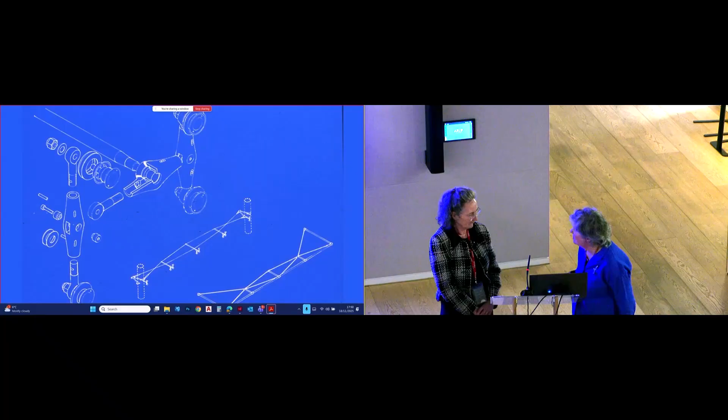So in these diagrams on the right, you've got the big cable truss which stabilizes the columns and beams, and then behind each seam between the pieces of glass, you've got those little cable trusses. So when the wind blows into the building, it's the inner cable that takes the tension, and when it comes out, it's the other cable. It's actually quite a flexible structure.

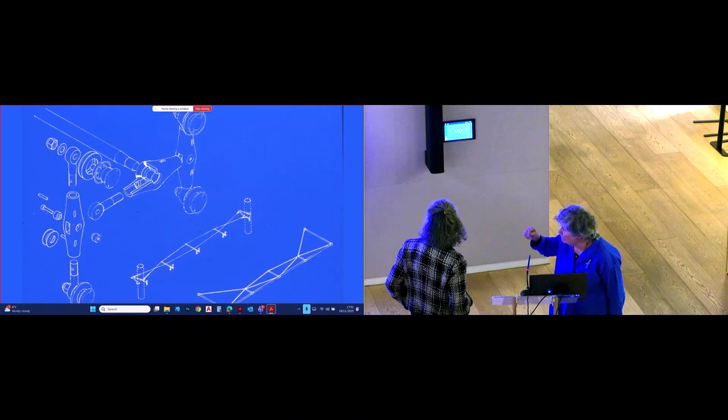And so we had to really worry about how you would attach the glass. Glass is very strong in tension and compression, but not very strong in bending—well, it's the tension part it's not so good in, because it fails brittly. So we had to make sure we didn't put bending stresses into the glass as it deflected. You can sort of see in that exploded mechanical bit, there's actually a spherical bearing that goes round the bolt, so it's as close as we could get to putting a pure pin in the plane of the glass, which is something that stuck with me.

Yes, because when we left the AA, we actually set up a model-making company. We didn't actually go and work for architects straight away. We were doing all the models for the lightweight structures, because it was a seminar where they invited engineers to come from all over the world and learn about lightweight structures with Peter Rice and Frei Otto. And we were lucky enough to hear Frei Otto give his talk, which was absolutely amazing. He had the wisdom of an old man and the enthusiasm of a child. It was just fantastic.

And then after David and I set up, we decided to go in for this competition, the Bridge for the Future, which was organised by the Institution of Civil Engineers. They called for a bridge of the future that had some relation to nature. That got us thinking about what was nature's biggest bridge, and we decided that it was the spine of a dinosaur. So that generated the idea for the bridge.

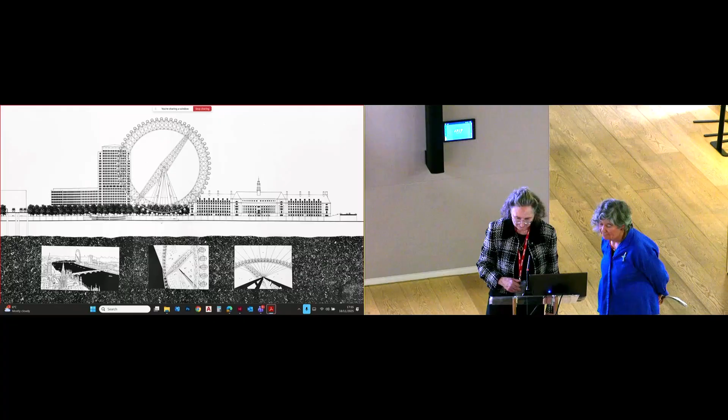Also, Jubilee Gardens was the site of the Festival of Britain in 1951, so there'd been a great celebratory heritage on this site. There were many reasons to choose this as the correct site. And of course, we asked Jane to work with us - she was at Arup at the time - and we attempted to redesign the wheel, which is probably...

So I got this phone call just before Christmas - would I come for a meeting? Dave and Julia said they wanted a wheel of the 21st century, as transparent as possible. I think ideally they would have had nothing between the spindle and the rim, and I explained that would be tricky. So the least structure we could have was this beam going right the way across.

But of course, it did have two huge semicircles of complete daylight, but that does mean the rim is quite heavy. Julia had spotted this site right next to County Hall, but the other crucial thing is that it's actually hanging over the river, so that meant we needed a cantilever spindle. The other thing was we decided right at the very beginning that the capsule should be on the outside, not dangling inside a truss, and that was that.

So this was a first. It was very much the idea that visitors would be like on top of a mountain in the middle of the city - they would have a 360-degree view, and that was what we were trying to create. And it wasn't a white knuckle ride - no, it was very gentle.

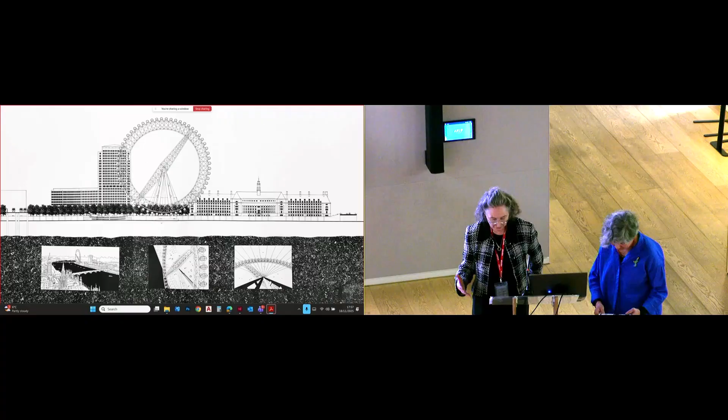But we didn't win the competition - in fact, nobody won the competition. But we thought it was a good idea, so we pursued it. We founded the Millennium Wheel Company, did a back-of-the-envelope business plan, and after preliminary discussions with landowners, we submitted a planning application.

This came to the attention of Mira Bar-Hillel, a journalist on the Evening Standard, and she showed it to her editor, Stewart Steven, who immediately loved the idea and ran a Back the Wheel campaign. We also had some very good printable images, because computer imaging had come of age at that time. We met Alan Davidson, a pioneer in CGI imagery, and the photographer Nick Wood, and created some great images that got shown in other newspapers as well.

As a result of this additional publicity, the wheel came to the attention of Bob Ayling, CEO of British Airways. In December 1994, he was looking for a Millennium Project, and we were looking for investors. He shared the vision of the project, so he took 50% of the company and loaned us £600,000.

That enabled us to employ Arup properly and do a proper planning application, and also have another look at the structure, because redesigning the wheel was probably not fun. This wasn't the lightest, because you had to span, at the time, 500 feet, that arch.

So we said, well, let's think about the bicycle wheel. The bicycle wheel is the most magical tensegrity structure, really, because the vertical load comes to it from the spindle, and it's actually the horizontal spokes, only a couple of millimeters in diameter, that stop the wheel going into a horizontal oval. So they go into tension, and the support is provided from the ground. Also, there's a very slight angle between the spokes that go to either end of the hub, and that takes some of those lateral forces.

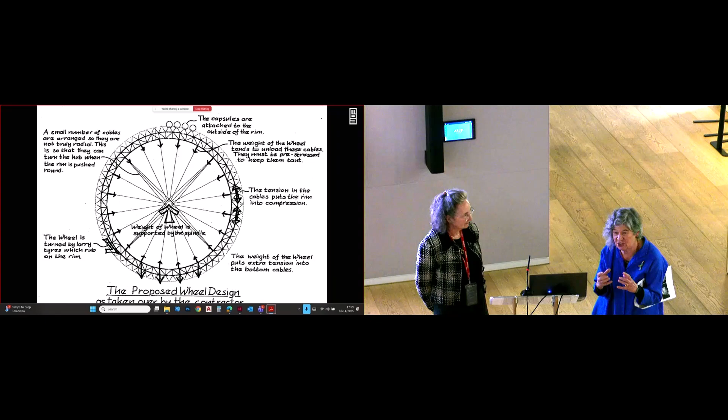Also, we've got cables going to either end of the spindle to resist the wind loads, and for this wheel the horizontal loads are pretty significant. When the wind blows, the cables on the windward side get more tension, but the ones on the leeward side tend to go slack. We don't want any of the cables to go slack, so we pre-stress it, putting the whole thing into compression—I'll come back to the consequences of that later. Right away, we also had the capsules on the outside.

So this was the structure we developed for the planning application. Over the next two years, David and I presented the project to all the principal authorities, the government bodies, English Heritage, Royal Fine Art Commission. That didn't go terribly well, but most of the other societies were really positive about the project.

Then we got full unanimous consent in October 1996. This is a model we were able to build with the £600,000 we got from British Airways, and this is one of the other images we presented—the Queen's eye view from Buckingham Palace. You can see it's still 60 capsules at this stage, because we saw it as a symbol of time passing—60 minutes.

One month later, the then Secretary of State for the Environment gave his opinion, and he could have called it in—it was John Gummer at the time, and if he called it in, he would have killed the project. But instead, he wrote a parliamentary answer that said, 'The wheel is an inspired idea that has caught the people's imagination and will boost the economy of the South Bank.'

I was lucky, I was on holiday in Singapore. I received this fax, and you can imagine me leaping around my bedroom in that hotel at this brilliant news. So that was full speed ahead.

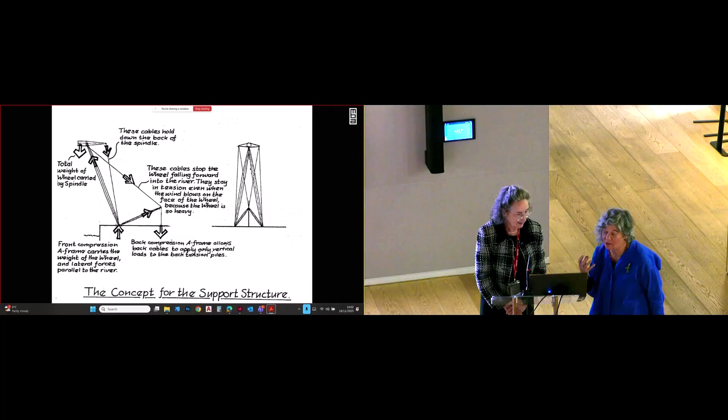One of the things we wanted to do was make the wheel sit as lightly as possible. This was the original concept for the support structure. It's basically an A-frame, and the cables at the back stop the whole thing from falling forward into the river. The weight of the wheel is such that however strong the wind is blowing, it would never tend to blow the other way, so we didn't need cables going into the river as well, which was lucky. We had that little A-frame at the back to deflect the back cables so they would come down to the ground vertically, minimizing the horizontal forces.

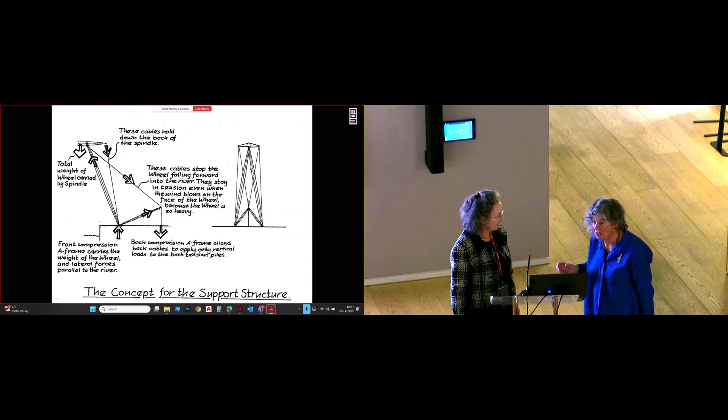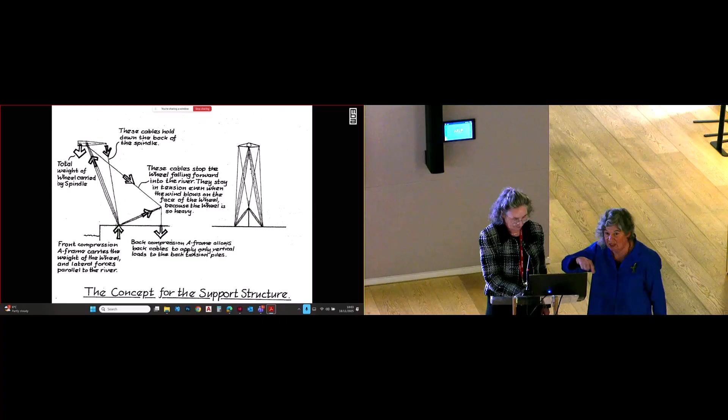Later that got changed because the construction method changed. At the time, Arup's project manager, Peter Platt-Higgins, was looking at how we would construct it. The original plan was that we would build it in segments, vertically, and then attach the capsules at low level. But later that changed.

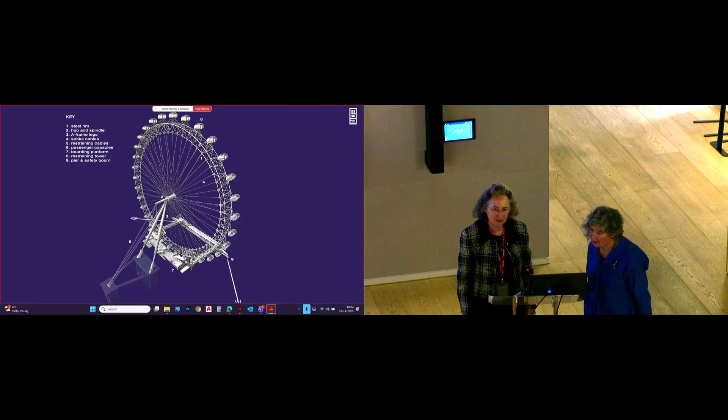So the final design doesn't have that back A-frame, but it does mean you have to have those big ground beams connecting the piles under the three support points. You also see that here we've changed the number of capsules, so it's no longer 60 capsules but 32 capsules, which is what we've got now.

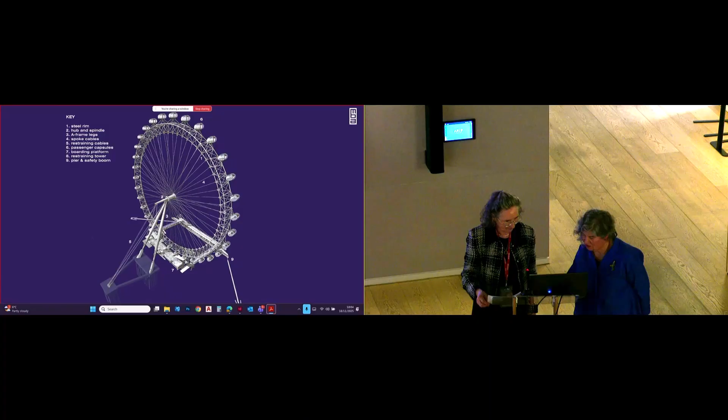That was actually quite a good thing, because to keep it affordable, but also you're not seeing the person in the capsule next door - you actually do see that 360 degree view. So that was a cost consideration.

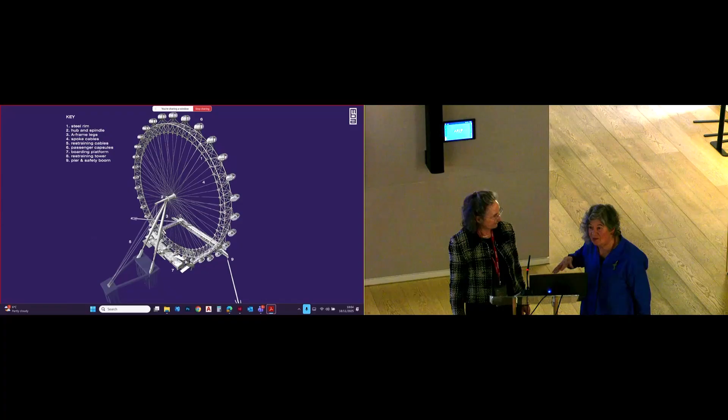Value engineering was beneficial. You can see there's a structure to the right that's in the river - when you go, you'll see there's another pier, and it works as a pier but it's also providing vessel protection. We had to design the wheel, even though most of the time the water is very shallow under the wheel, for a 60-ton vessel hitting it, so that's protection for that.

I mentioned we had to put a lot of pre-stress in the cables to make sure they never went slack. But that put compression into the rim, and you've all seen a buckled bicycle wheel, where two quarters come towards you and two away from you.

That's what we really had to do a lot of analysis for, to work out the optimum size for the triangular perimeter truss and the optimum length of the spindle, because the longer the spindle, the larger the angle between those wind-resisting cables, meaning the forces were less. But you didn't want the spindle too long, because then it was impossible to build. Similarly, if you made the truss stiffer by making it bigger, you'd make it heavier, and then you'd need more pre-stress to counteract those forces, so you'd be going in circles.

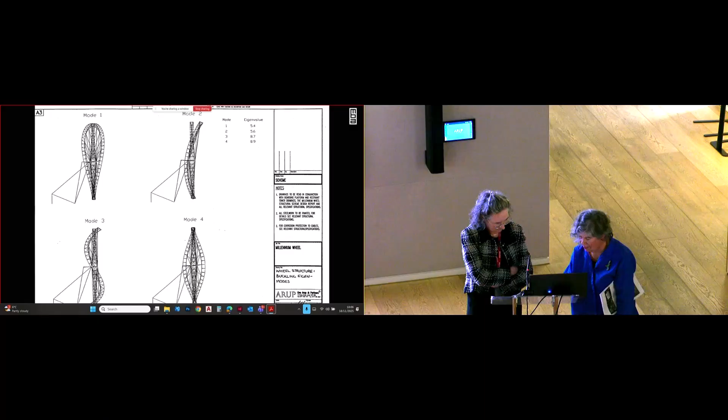So Pat Dallard, a structural engineer - I don't know if some of you remember him - wrote fantastic programs so that we could optimize those dimensions.

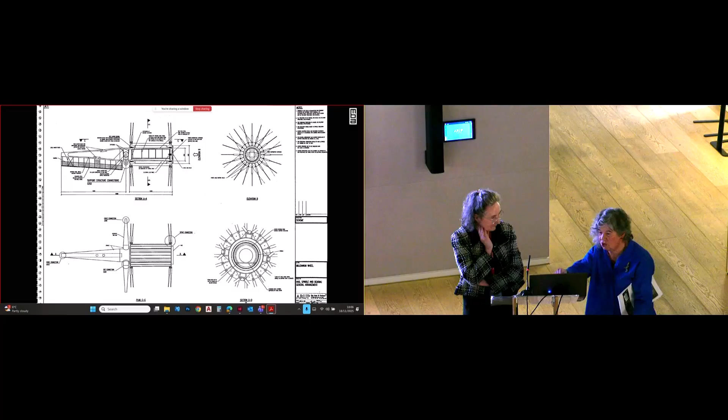Then we worked hard on the hub and spindle and what it should be made of. It's a bit like a bicycle, and we've got two sets of ball bearings - you'll see what it ended up with finally, but it was not so different from this.

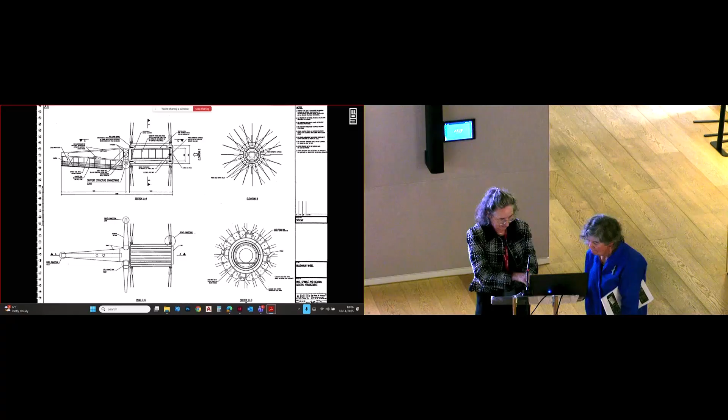Again, we looked at lots of different combinations of how many spokes would be the best and most efficient, so that we weren't getting buckling, so we could make the rim as light as possible, and also we were always aware that we had to make sure it would still be beautiful.

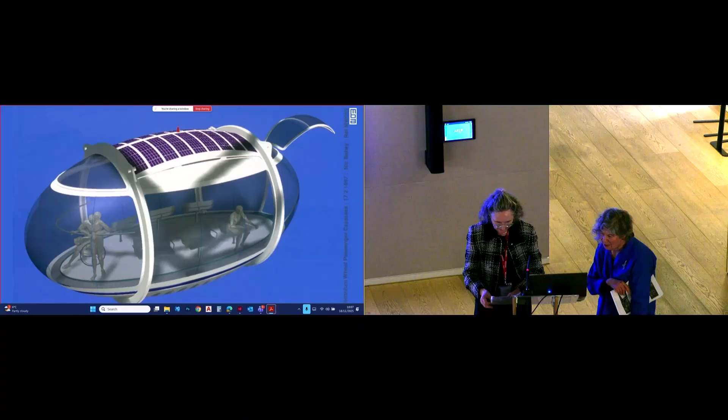Just focusing on the capsule design, the fact that the capsules are on the outside means that they're supported with circular mounting rings attached to the rim, and they have to be motorized. There has to be a motorized stability system that drives the capsules around and maintains the level. We worried about a whole team of rugby players jumping on one side so that by the time it came round, the wheel or capsule would be upside down. But the capsules are aerodynamically shaped to minimise drag on the main structure.

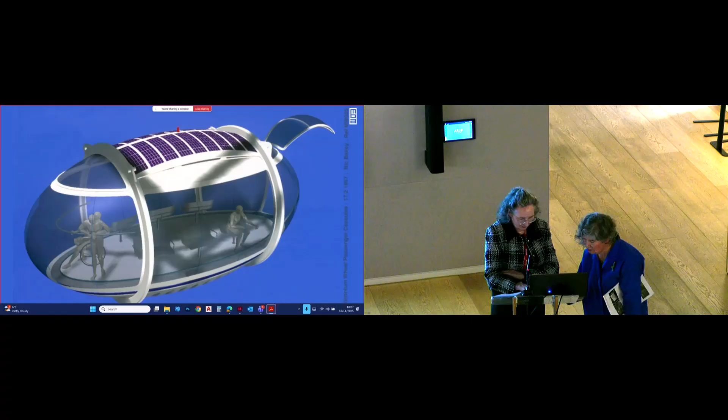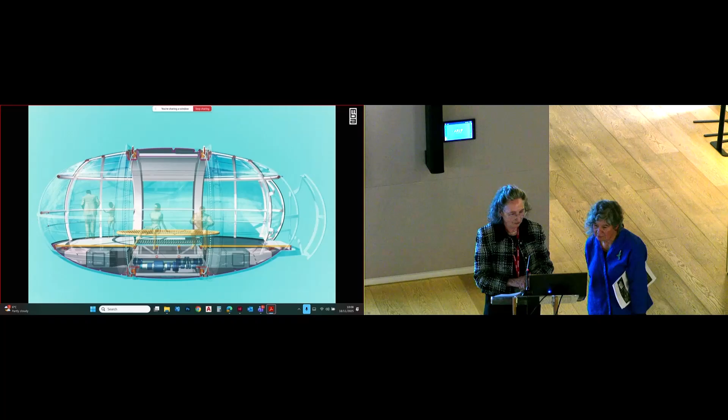On this one, this was a very early design, and the outboard mounting ring is on the outside. We found that having it on the outside actually contributed about 40% extra of the total wind resistance. So we pulled the mounting rings onto the inside, and that dealt with that issue.

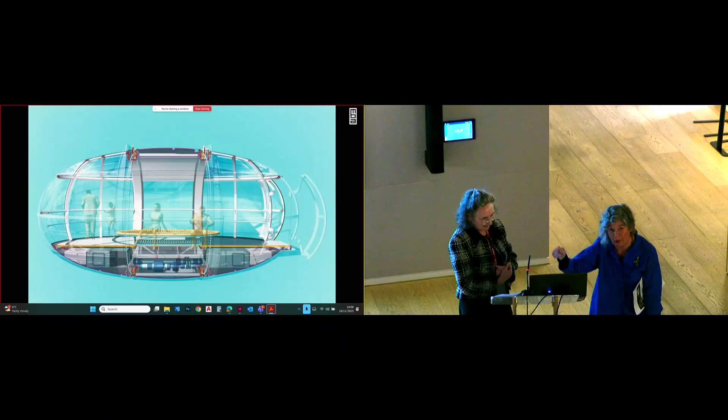It's quite a complex system of maintaining the level, and you can see it's all under the floor. I'm not sure if we've got time to go into it in too much detail, but there are wheels under the floor that run on the inside of like a huge cogwheel, and they're motorised, and that's all linked in.

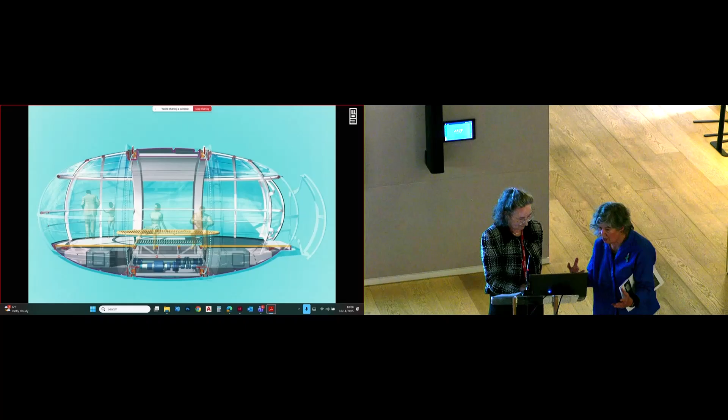It was a very good combination of Nick Bailey, who was working on the appearance and how it would function for the number of people using it, and John Lyle at Arups, whose background is more car design, and then Poma as well feeding in. So it's a really good collaboration.

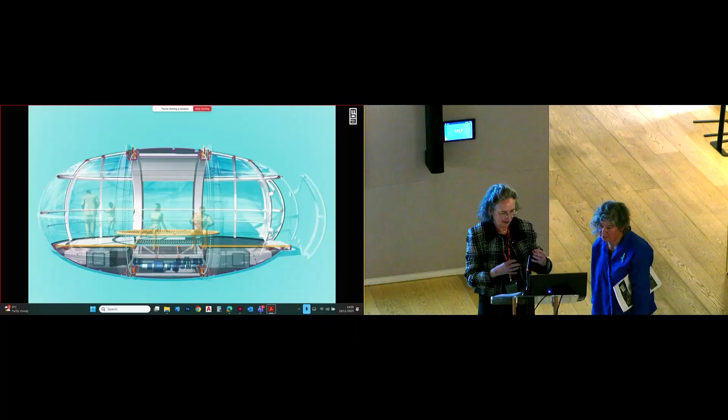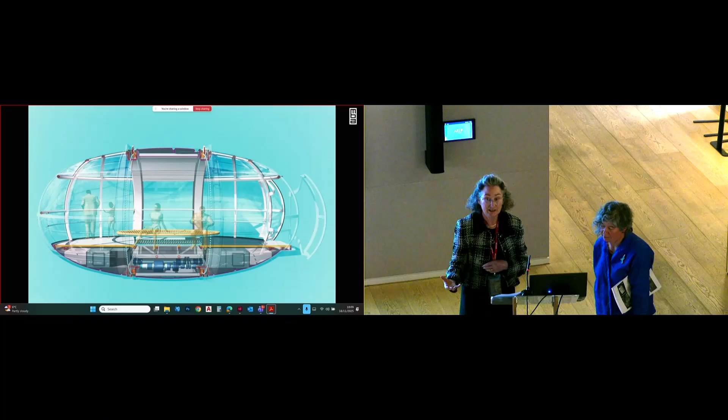The thing about it is that although it ends up being quite innovative, all of the pieces used there are actually pieces that existed. The technology existed. So the innovation part was actually bringing tried and tested technology together in a new way, and that was the kind of innovation of the thing.

I mentioned before that British Airways wanted to have a main contractor, and we actually went out to tender, and then Mitsubishi were signed up because they were £10 million cheaper than anybody else, on Christmas Eve 1997. But during subsequent negotiations, they reduced the size of the wheel and the number of capsules, which was actually a good thing. But by April 98, things had gone very much awry, and there was a fateful night when we were forced to kill the project.

Mitsubishi were insisting that the only way they could achieve the programme and our immovable deadline was to do bog standard capsules, and this was what they showed us. This is literally the specification: English oak floor replaced with another cheaper material, handrails replaced with iron and steel, and the stability system removed and replaced with a gravity system.

We were presented with this, and we were actually told by our partners that if we didn't say yes to this, we would kill the project. So we had no option but to say no, because we would have been laughingstocks, and it's not what we got planning permission for.

So we did say no, and then it was actually Tim Rennick, a project manager at Mace, who helped patch things up. At a crucial meeting of British Airways, they agreed to change the funding structure that enabled the construction of the wheel to go out in individual packages, and Mace were appointed as construction manager. Hollandia and Poma were the principal subcontractors, and in the end we found no British money—it was a German bank, West LB, and a Japanese bank, Sumitomo, who actually funded the wheel.

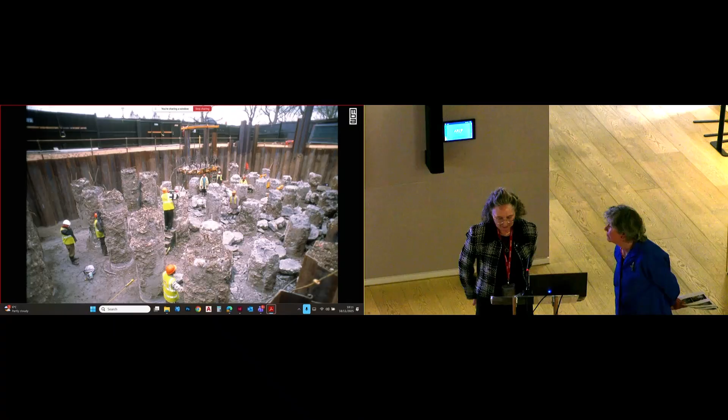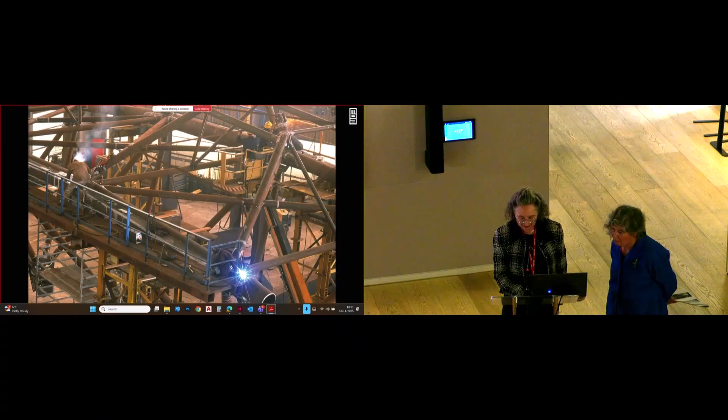By that time, what should have been a 2-year programme had to be built in 15 months. This is the site in December 1998, with one year to go, showing the tops of some 44 concrete piles that go 33 metres down into the ground. This is the Hollandia factory, where over 60 welders worked in 3 shifts for 8 weeks to manufacture the rim.

It was a 64-sided rim that was constructed on the jigs in Hollandia's factory.

And then this is each of the 16ths completed. The rim sections are welded together as quarter sections, ready to go across the water to come to London. That was fortunate that pieces could come just by sea the whole way. Yes, they just came on barges.

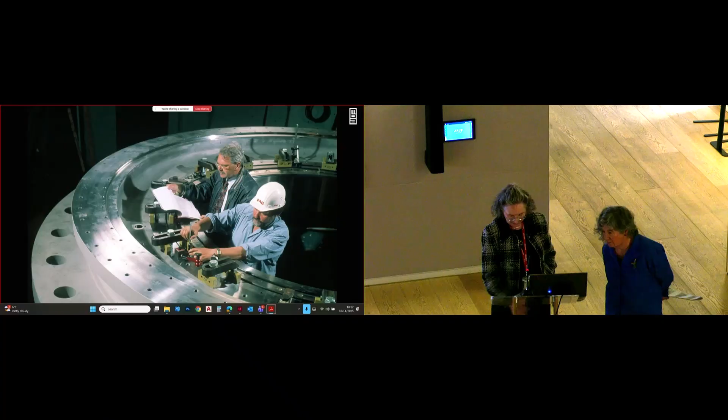And meanwhile, in the Czech Republic, the spindle is being made. It was fabricated in 7 sections of cast steel using a very special steel recipe, where each piece took 2 minutes to pour and 1 month to cool down. A crucial piece of engineering, of course, is the spindle, because it takes all of the weight, as Jane has described. And then this, back in Holland, is the hub being fitted to the bearings a bit later on, with all of the bearings being German bearings.

And this is the hub and spindle being put together. And then this is the cables being spun in Italy. Italian cables that were actually quite innovative in their own right as well.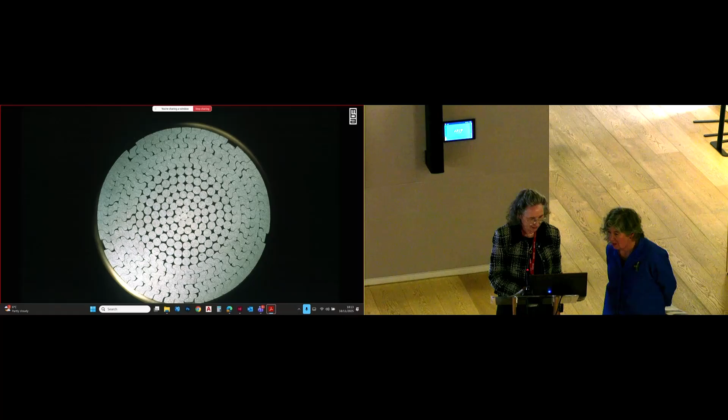But you know, when wind blows past a circular section, there's always a tendency, if it's constant, to get a slight horizontal perturbation. You see chimneys with a strake going round, which stops the airflow being so constant. These smaller elements give the equivalent of that, but it's like a recessed strake that goes very, very slowly, or gently, around the cable. So that was a good innovation.

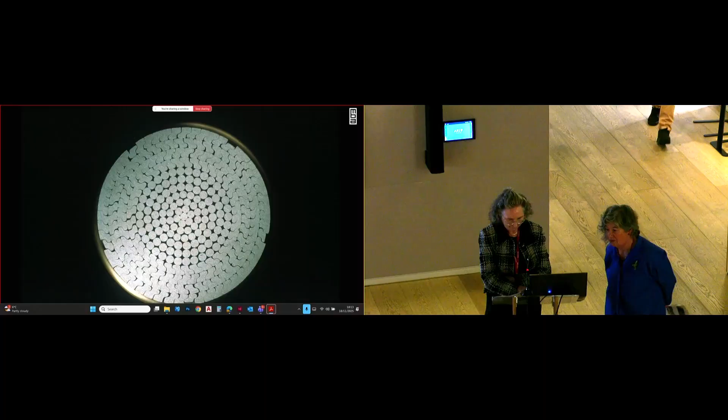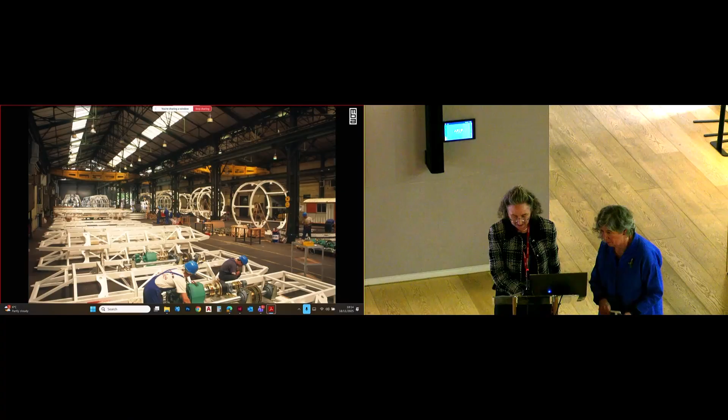And this is the capsule frames being assembled in the factory in Grenoble. And this is the first quarter section coming through Tower Bridge. We found out afterwards they didn't actually need to raise it, but they did anyway, just for a bit of theatre. And the fact that it was so visible on the river created quite a lot of buzz around.

And you can see that it was going to be built vertically, but then Hollandia in October '98 told us they had real concerns about safety and programme. I was quite lucky that because of the bend in the river, it's actually much shallower on this side, and it means the navigation channel is on the other side, so this wasn't in the middle of the navigation channel.

So it was built vertically, and this is it when it was completed and just about ready to be lifted, and this is it being lifted at 32 degrees and at 62 degrees. This is Boadicea welcoming the London Eye onto the skyline, and this is when it was vertical.

And then next, of course, came the capsules, looking like huge dinosaur eggs. It was amazing because by that time we'd lost a bit of time and had this immovable deadline, and they were able to fit all the capsules in 9 days.

And this, of course, is the Millennium. That was actually a picture from the Millennium.

One of the things I'm most proud of is that when we originally did the wheel, we only had permission for 5 years. After about 4 years, it was clear it was very popular and very successful, so we went back to Lambeth Council to get a further 25 years. David and I insisted that 1% of the ticket revenues from the London Eye should go to the local community in perpetuity, and we recently had an event celebrating that. It turns out that in the last 20 years, that's amounted to about £14 million that's gone from the London Eye to local community groups and to the South Bank. So that's great, that's pretty good, I think.

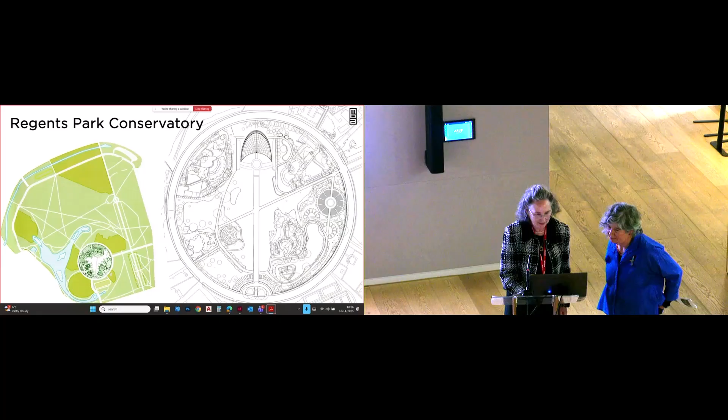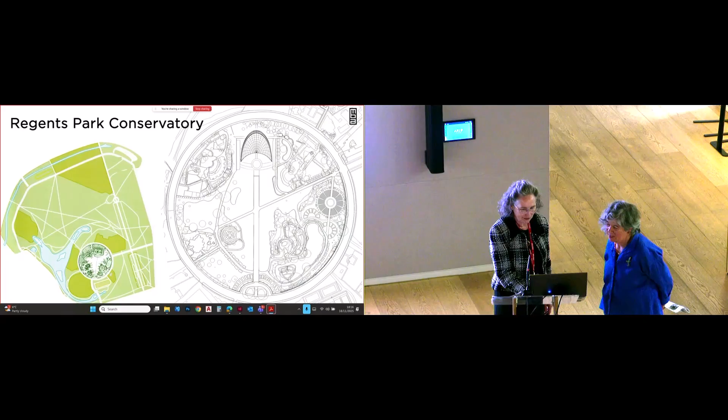And then this is another conservatory project that we did together. This was a project for the Regent's Park Conservatory that sadly did not happen, but we were trying to do a glass and tension structure, really trying to do a kind of 20th century version of what Decimus Burton and Richard Turner did. But sadly, it wasn't liked by certain gentlemen of royal distinction, if the word carbuncle means anything.

And it was very popular. But it used scaffolding, which is very expensive to keep.

So then we were brought on board as the team to do the treetop walkway. And an early decision really was what material it should be built out of.

So Julia and Tony Kirkham, the arboriculturist, and I walked round the site, which had been laid out originally by Capability Brown. There was a cherry picker there so we could see how high the pylons needed to be, which is 18 metres, and we discussed what kind of structure we should have that wouldn't compete with the trees, because the purpose was to see the trees and the canopy and appreciate that.

We thought about timber, but it would have been too massive because 18 metres is very high for a column. If it was steel, if you had to paint it, you'd have to choose a colour that wouldn't stick out like a sore thumb, and also that would be a lot of painting. Yeah, a lot of maintenance.

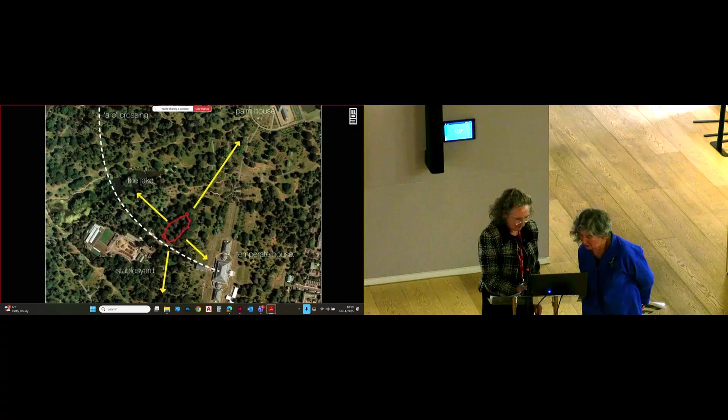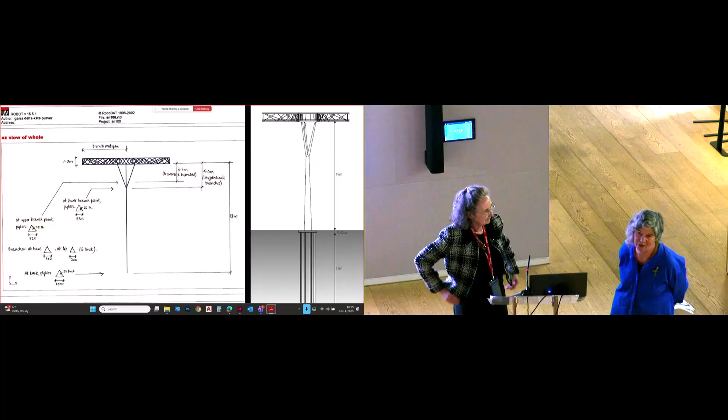So what was very fortunate about the choice of weathering steel is you can't get rolled sections. So QS couldn't tell me that I had to have circular hollow sections as the pylon, because I think that would have been horrible. I particularly don't like circular hollow sections, because I think they always look bigger than they are.

And I'm very fond of triangular sections, which look thinner than they are, and you get that sharp vertex. It also meant we could taper it, and that would be more economical, because it doesn't need to be as big at the top as it is at the bottom. That's what this is showing.

And also we decided that we wanted to incorporate the Fibonacci sequence, because all architects love the Fibonacci sequence. Yes, of course we do. Mathematical rules of the universe are visible to us in the form of beauty, as John Michell said.

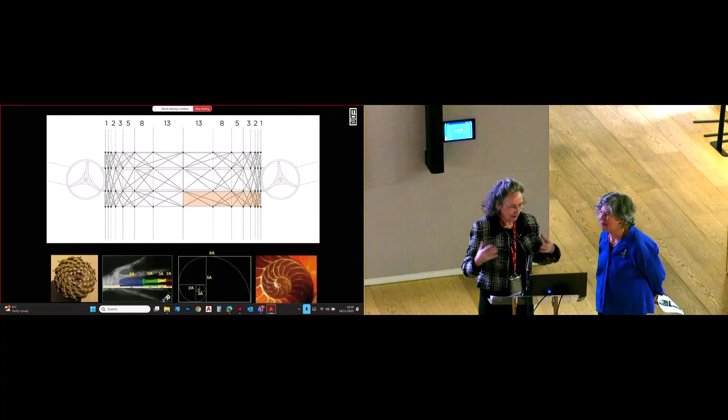So we decided that we wanted to put all the structure in the handrail. So you've got to have a handrail, and we just didn't want to have any extra structure either above or below. So it's all in the...

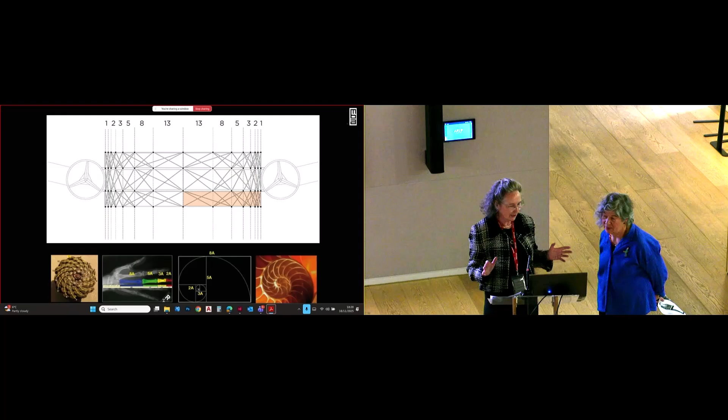And in fact, a very clever thing that Julia Barfield did was, because you've got that 100mm gap, we looked at other options where we had diagonals at 100mm centres, but it was just too fussy. They said, well, we can use this kind of Expamet as the cladding, and the structure should just be what it needs to be.

And then trying to think about how we could incorporate the Fibonacci sequence, so it starts off as small numbers that get wider and wider. With the truss, the shear is greatest at the supports, so that's where you would need the most diagonals.

So I said, let's make the spacing of the intersection of the diagonals with the bottom boom. The top bit is the balustrade, the middle bit is the floor, and it's like the whole thing folded out.

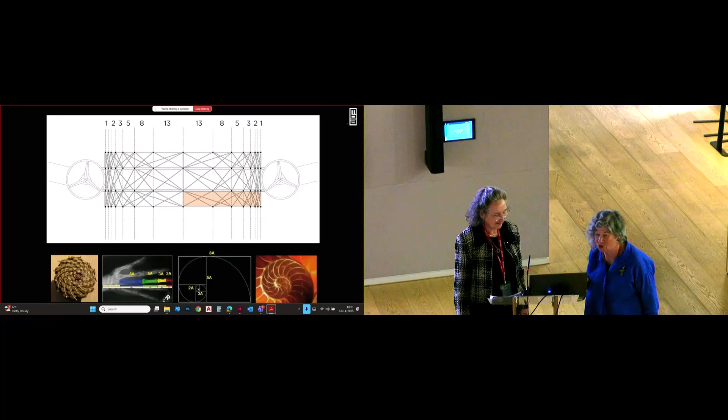And also we said, let's not have more than 3 diagonals meeting at one point. So then Julia and I sat down and we doodled joining the dots to satisfy that rule. And you can see the bit shaded pink can be flipped, so it's repeated - for off-site manufacture it's a lot of repetition, which makes it more economical.

And the thing about this project is that, like the other projects we've talked about, we also involved the maker very, very early on. So let's talk about this a little bit more.

So obviously we had to have foundations for these very tall pylons, and they're going to have quite a lot of horizontal forces on them. So you had to have a minimum of 4 piles at each location for the wind in any direction. And normally you connect your structure to your piles with a pile cap 1 metre deep, thick of concrete.

But the roots of a tree, it's like a wine glass - the roots go out horizontally in the top metre of the soil. If we were to put a big concrete metre-thick piece in the ground, we'd have severed all of those roots. We did do a mock-up, a plywood mock-up of the pile cap being above ground, and it looked horrible, of course. So we decided instead to join the piles together with this very, very heavy steel grillage.

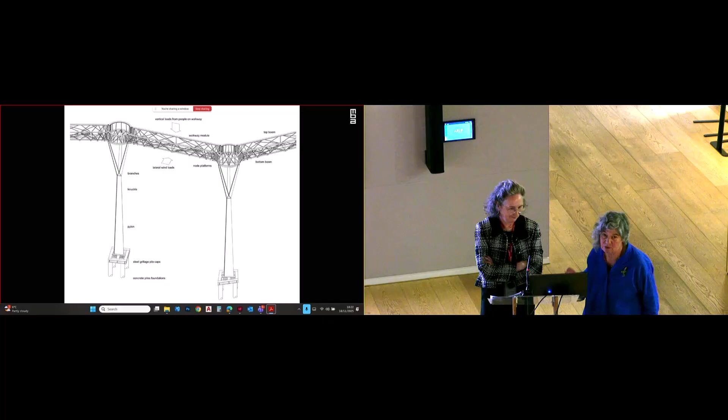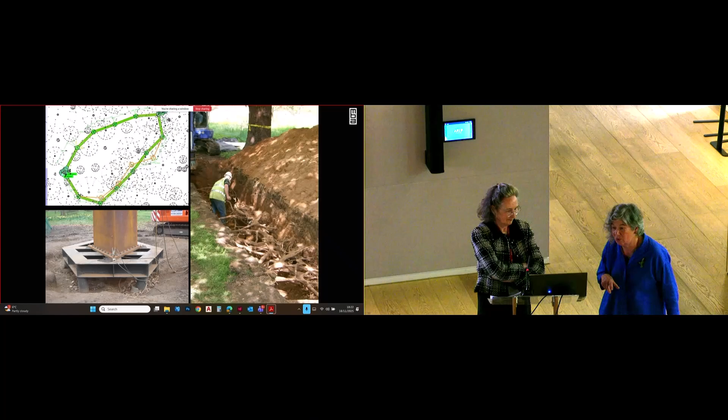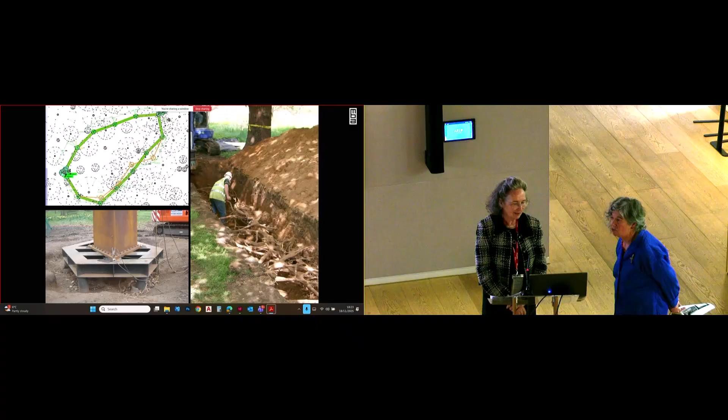So it's a steel pile cap, which is quite unusual, but it meant at each location the piles had to be specifically placed to avoid the tree roots, which were surveyed. So they're not perfectly square, and in some cases we needed more. This shows the fact that we had that survey done of all the tree roots, and we actually had to move the pylons to be out of the positioning of the main roots.

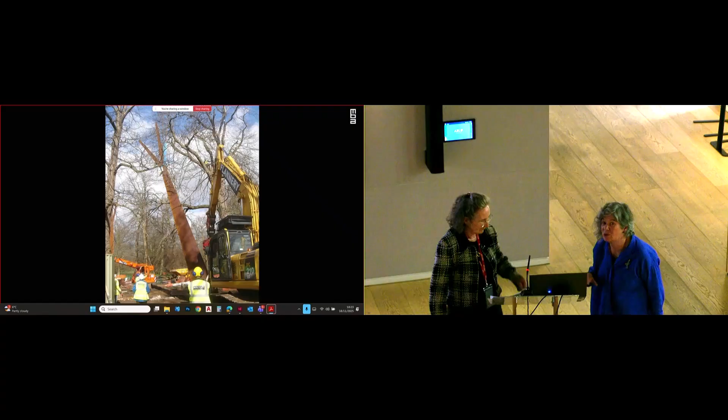And then this just shows - so this is where I'd like to talk about Britland Steel and Tony Marriott, who we actually brought on in what would be now stage 5, I suppose, so that we were happy that he would be able to build what we had designed. But it also turned out he got on really well with Tony Kirkham, the tree surgeon. So they really worked together perfectly, and it was a really happy project from that point of view.

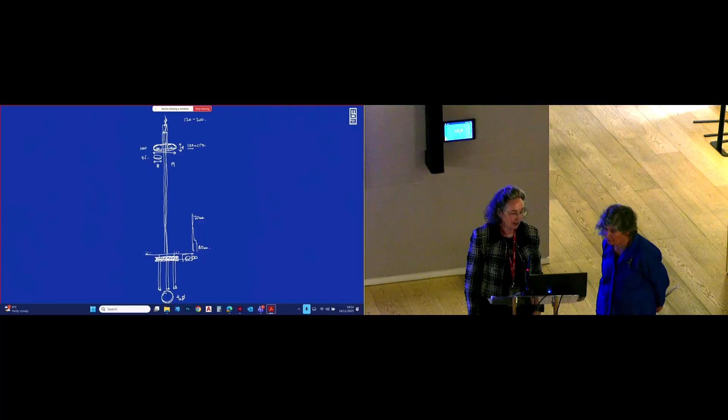And then quickly, this is the I360, so a kind of son of the London Eye, really. We kept on getting asked by various people to do wheels around the world, and we realised that not many places could afford a wheel as such. The experience of rising slowly up to a great height was what people were really wanting. So we decided to redesign the means of getting up to the great height.

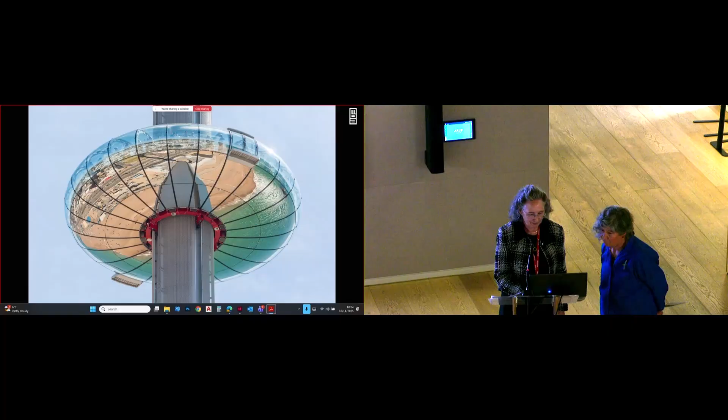For a lower cost - and this is the result of that. I won't go into too much detail because we're running out of time, but we basically got the old band together, so Hollandia did the structure, Poma did the capsule, and we built a version of that in Brighton.

We also, the project paid for redoing the public realm either side of the I360. So it was a regenerative project as well, because that part of the Brighton seafront was virtually derelict when we started.

So Cambridge Mosque - this is a competition that we won in 2009 and took 10 years to realise. We worked with many different engineers on this project because it went on for so long. It was very much a stop-start project, mainly because of funding, not because we didn't get planning permission - we actually got planning permission quite quickly.

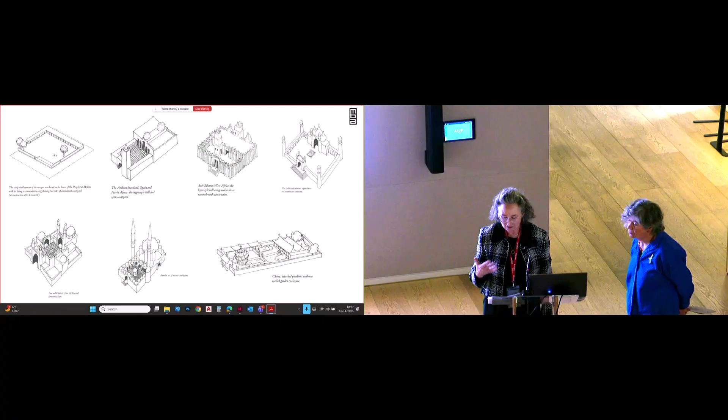You may have the idea it's all to do with a dome and a minaret, but actually, if you look at a mosque in China, or in sub-Saharan Africa, they're actually very different. They take on the local vernacular of their place and time and the local cultural conditions as well.

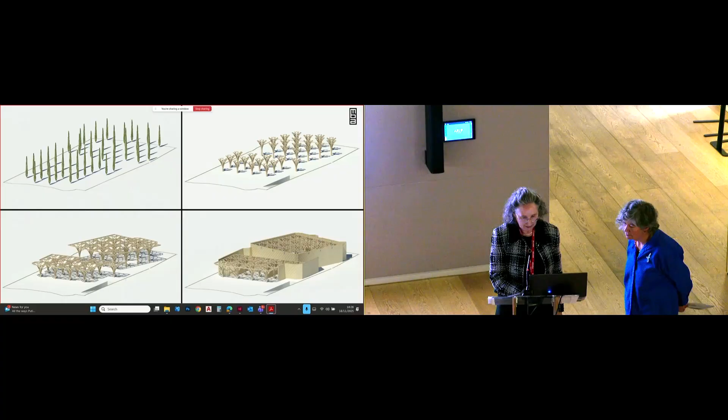This is another example where we found the people who could make it at an early stage. Blumer Lehmann is a fantastic Swiss company that makes timber structures, and we found them and got them involved even before we got planning.

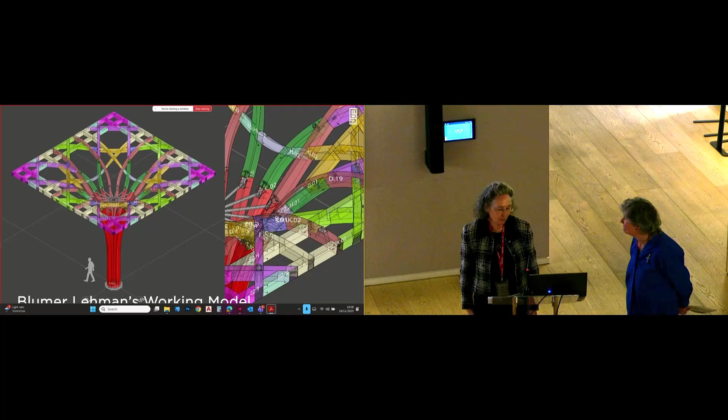This, I think, is one of my favourite working model drawings - one of the most beautiful you can see. They had it all worked out to the last millimetre.

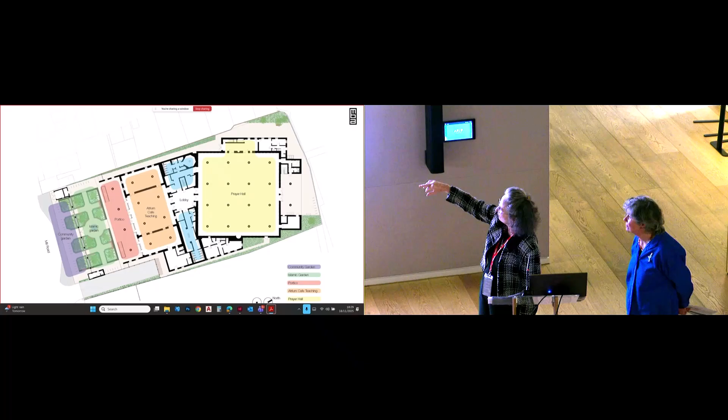And this is the plan. Mill Road is on the left, and it's really a journey from the everyday and the busy road, going through a community garden, through the Islamic garden, through the portico, through the atrium. Then on either side of the atrium you have a teaching room and a cafe, and then the ablutions on either side of the lobby into the prayer hall, which is orientated towards Mecca, with the Qibla wall on the lower level.

And this, you can see it in context. The idea was that we wanted to do a project that fitted into its context, but also stood out - somehow doing that together.

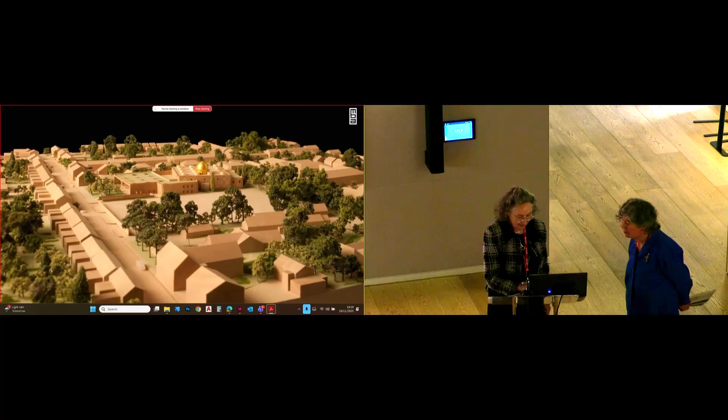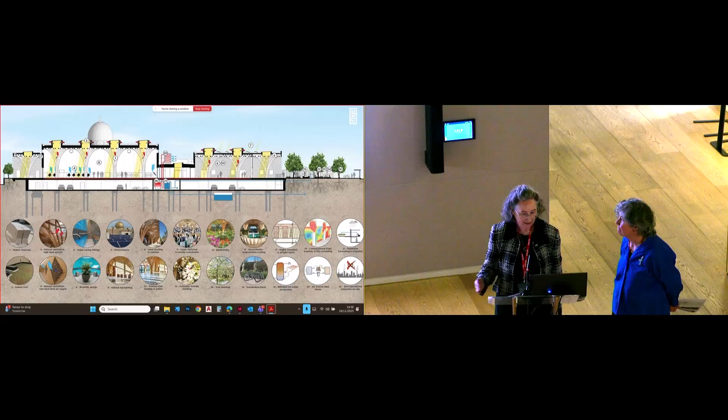That's during COVID, with the dome, and it's probably the UK's greenest mosque. It's designed to be entirely naturally lit, naturally ventilated. It has no fossil fuels, and this decision was made in 2009. The rainwater's collected and flushes the toilets, so it's lots of green.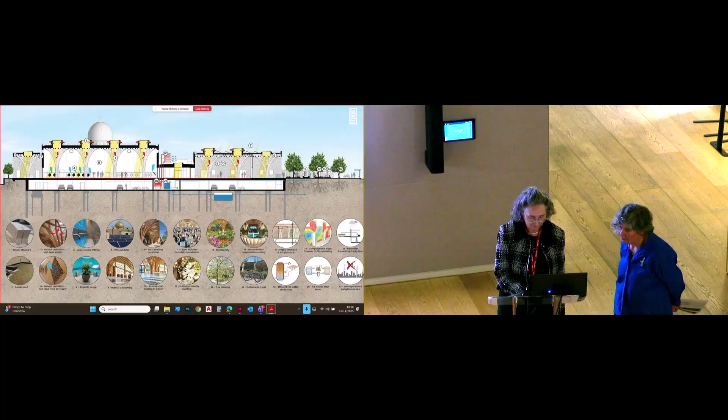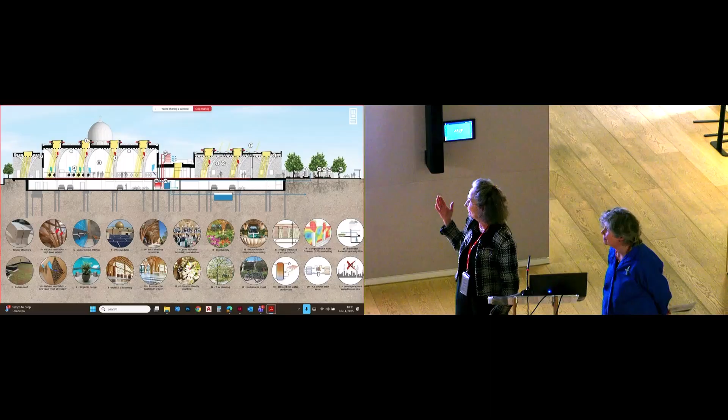It's also the most women-friendly mosque in the country. We found out recently that a third of their income actually comes from weddings, and they said quite openly that they think that comes from the architecture - that everyone wants to take a photograph showing the architecture. So that was very nice to hear. They have about 300 weddings a year or something.

So this next project - there's an architect called Peter Beard Landroom, who I've collaborated with for many years. I first met him doing some teaching at Cambridge and then at the AA, and he's tended to do quite gentle projects, often in remote places.

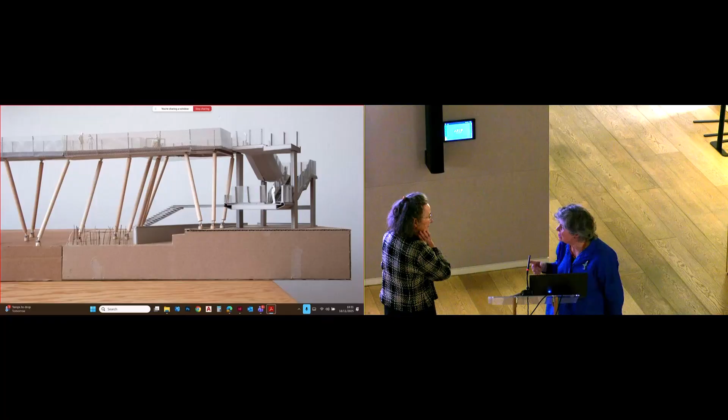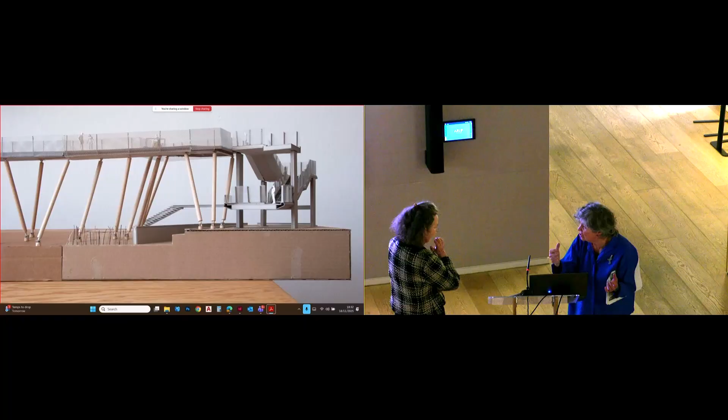This is the architect's model showing how it comes to the top of the footbridge, the existing footbridge. What you'll notice is it's got lots of inclined timber columns. If it was to sit lightly, those columns don't meet at a point at the top. So stability comes from the combination of these columns at different angles combined with a bending stiff structure, which is the walkway. Those columns are as close to being like trees as they could be, but they are treated. They're about 600 diameter at the bottom, and the longest ones taper to 450 at the top, which you see in the completed one.

This was partly, Peter was lovely to collaborate with because he really let me say I'd like to try out these structural ideas. I suppose this was a way of working I'd seen Peter Rice do all those years ago when he was contributing to Centre Pompidou, talking about Jean Prouve's work, I knew that he had wanted to try out using cast steel as opposed to cast iron. So I think it is quite interesting sometimes to take a structural idea and see where it leads you.

A few years before, I'd worked with Mack Scogin and Merrill Elam, who are Atlanta architects. This didn't get built, but it was to have been really a kiosk for the Olympics. Those columns are about 100 foot long, supporting a canopy that is a timber space frame, and it has, therefore, bending stiffness. Again, the columns are at all different angles, but they don't meet together at a point. And in the process of that, we were wondering how we would make a timber space frame.

The reason we're using timber is because Georgia Pacific owned the site and they were going to donate the timber. We came across this engineer called Peter Bircher, a German engineer, who'd developed a system like the Mero steel space frame system, where you have a spherical node and then you can have elements coming in at any angle. That's a cast steel node, and then there are steel pieces that get embedded in the timber, and then there are cross elements so it can take tension and compression.

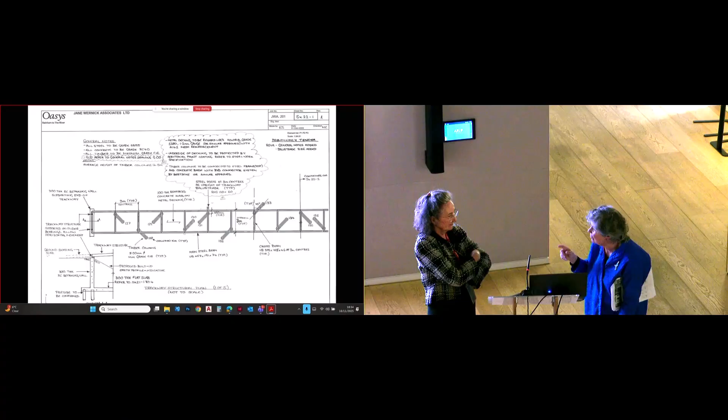This is just showing you the bending stiff ladder, and it's supported by these timber columns. They look as if they're kind of randomly spaced. In fact, every single column goes from one point at the top on these cross members that are 3 meter centers to one of 4 positions at the ground. So they're always at the same angle to the vertical. So there's a rigor to the geometry.

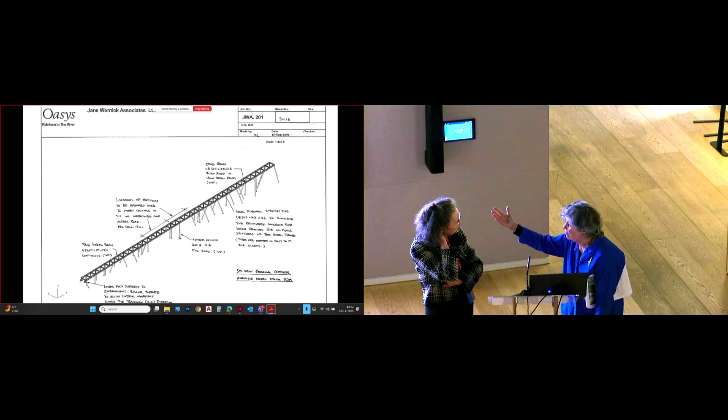Going back to this one, what you can see is that we couldn't attach them to every single cross beam because we've got lots of obstructions at ground level, like a watercourse, a road, and lots of underground services.

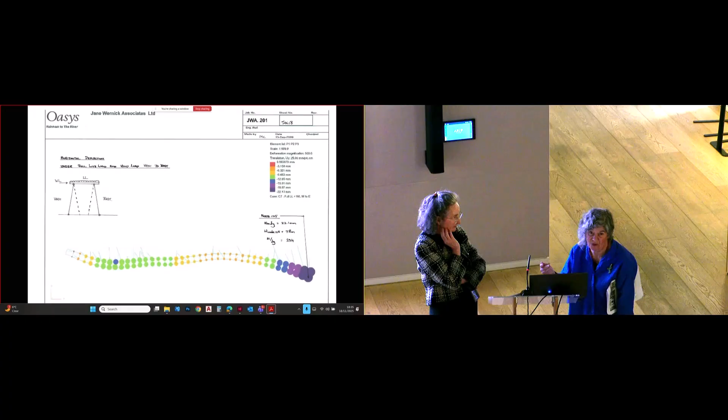Then, of course, we had to make sure that it wouldn't wobble around too much, couldn't deflect too much. In fact, the maximum deflection is height over 330, so that's fine, that's a lot better than a height over 180. But we also had to make sure that we didn't get wobbly bridge syndrome, so we had to get the natural frequency to be above 1.3 hertz. And we did lots of analysis of this.

We had to model the feet of the columns. They're attached to concrete pile caps, but they couldn't go the whole length of the pile caps because of all of these other obstructions. So it's quite short lengths of pile cap, and also the piles themselves are going through quite soft ground because we're near the river. So that was the major challenge.

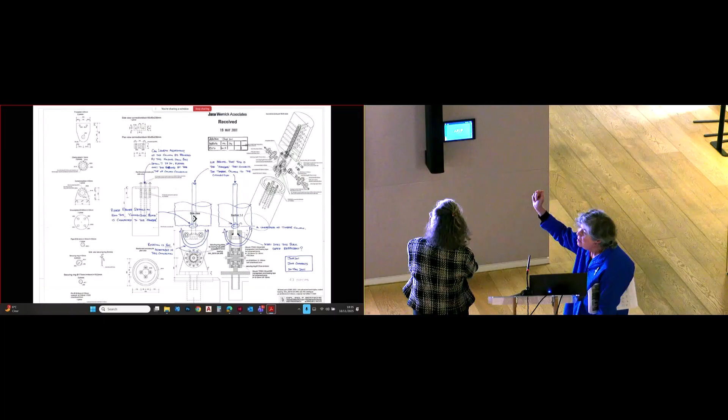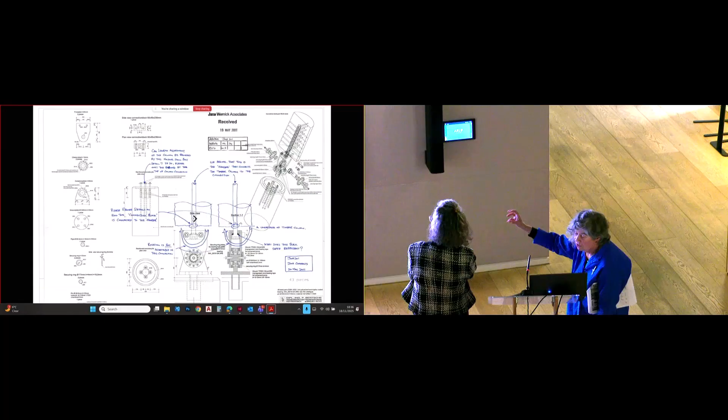I'm just showing you this one. On the top right, you can see us using Peter Bircher's method of putting a steel rod into the timber, and then with these cross dowels, so it can take tension and compression. In the bottom right diagram, you can see that we've actually got the equivalent of the rotule, this spherical bearing that we had at Parc de la Villette for the glass. This is all to make sure that we don't put bending into the timber columns, so that they could be as small as possible. So the columns are only taking tension and compression.

And this is it completed, and here you can see that they are a bit tapered.

Okay, now I'm going to talk about the West Somerset Lagoon. This is another kind of entrepreneurial project. I was approached by some eminent engineers who are working on this project.

Basically, it is a lagoon that goes from Minehead to Watchet, and the Bristol Channel actually has the second highest tidal range in the world, and it's completely untapped at the moment, which is obviously a waste. I was involved in doing the Severn barrage about 15 years ago, which hasn't happened and I don't think will happen.

So a lagoon is a much better way of providing the tidal range energy. This is the location we've chosen: it's outside any area of special conservation, and it provides coastal protection against sea level rise. It's basically a semicircular shape that maximizes the lagoon area with the minimum wall perimeter. It's outside the navigation channel to the Bristol docks and Cardiff, and also has quite a close connection to the grid at Sherton.

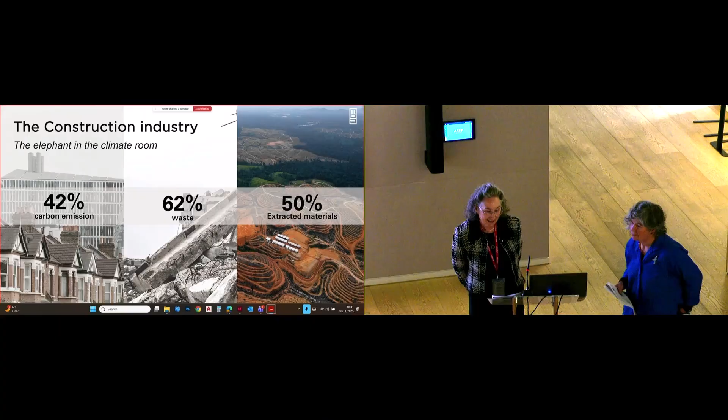As a construction industry, we actually have a huge responsibility. I'm sure you probably all know about this, but I'm going to say it anyway - the construction industry is the elephant in the climate room. It's responsible for 42% of carbon emissions, a huge 62% of waste, and 50% of extracted materials. So we have a responsibility to try and turn that around.

And we've been trying to do this. There are many organisations, and I'm sure lots of you are involved in some of these. Most of these are voluntary organisations, really trying to do things.

I don't think I need to go through them all, but we encourage people who work with us, and when I speak to students, and I'm sure when Julia does as well, we're always encouraging people to speak up - we can't be too timid about it. Collaboration and knowledge sharing is absolutely key.

I don't know if you all know about The Edge, but it's a fantastic voluntary group of people. It was first started by Jack Zunz, who was chairman of Arup at the time, wanting RIBA and the Institution of Civil Engineers to collaborate more. Its primary function is to get professional institutions to collaborate, but it's not just the professional institutions - we're realising more and more.

In 2019, we organised a climate action roundtable chaired by Lord Deben, who at the time was chair of the Climate Change Committee, and he had just persuaded the government to vote for the Net Zero by 2050 law. So that was really good.

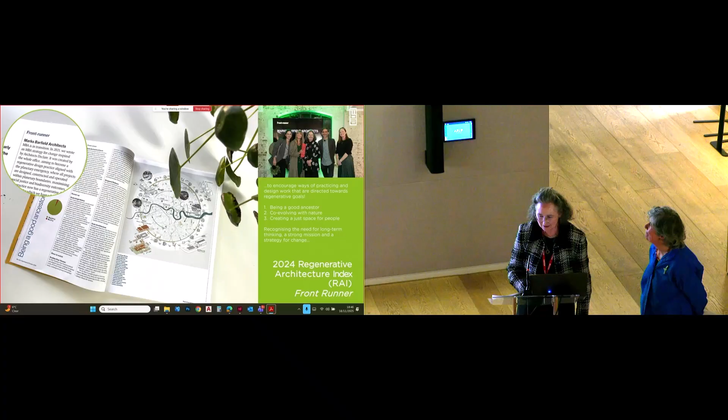Yes, and also we as a practice - I've basically turned the whole practice around to focus on regenerative architecture, the circular economy, and retrofit and reuse.

And recently we had the circular revolution. I don't know if you heard about that, where I do have access to the whole wheel. We took over the whole wheel, and in each capsule there were 15 people, and they had to come up with pledges and asks from the industry that they would do in order to create a more circular economy, because we realised the wheel is actually quite a good symbol for the circular economy.

People in each of the capsules had to come up with asks and pledges, and there were about 450 people, 250 organisations represented, and hopefully people from Arup were there - I'm sure they were part of it. At the moment, we're trying to compile all the pledges and asks done in the capsules, and produce a document that can be a starting point for the next stage.

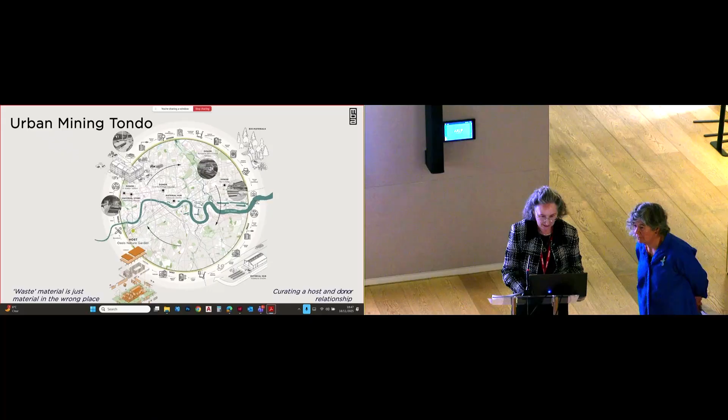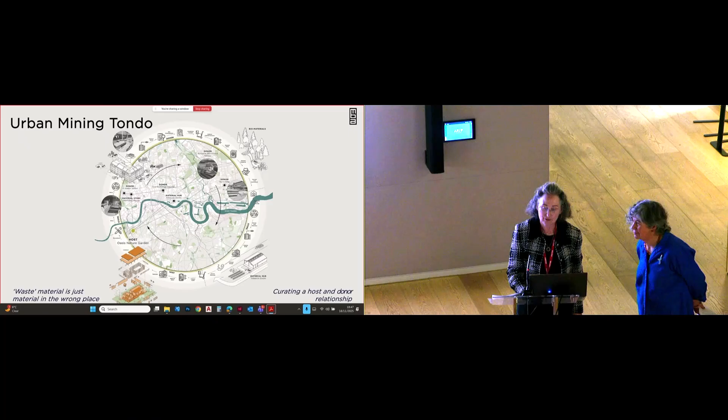And in Marks Barfield, we're very much focused on the circular economy. We actually did a project recently where, by reusing materials, we saved the client £1.65 million, which the client was quite pleased with. And actually, I'm currently a judge of this competition, which the United Nations University is having.

It's international, open to anyone under 40, individuals or teams, and it's an ideas competition, or it could be actual projects. It's just asking people to submit projects which embody all of these ideals.

There were two webinars which were pretty interesting. I actually spoke about Marks Barfield's urban mining tondo. There's a brilliant Swiss architect who spoke about an office building they retrofitted in Zurich, where they didn't take anything off the site. When they stripped out carpets and things, they used them as other bits of furniture or cladding or whatever. That was a pretty fantastic project.

Entries need to be in by early December. So here's your opportunity.

This is in keeping with it, isn't it? We just can't keep tearing down buildings. When we build buildings, we must think it's not a design life of 60 years—what's this all about? It should be 1,000 years. There's no reason why it shouldn't be, so long as we maintain them properly and keep the water out. Obviously we're going to have to replace bits, services and cladding, but the structure can be there forever if it's looked after properly. So this is just to wrap up, really.